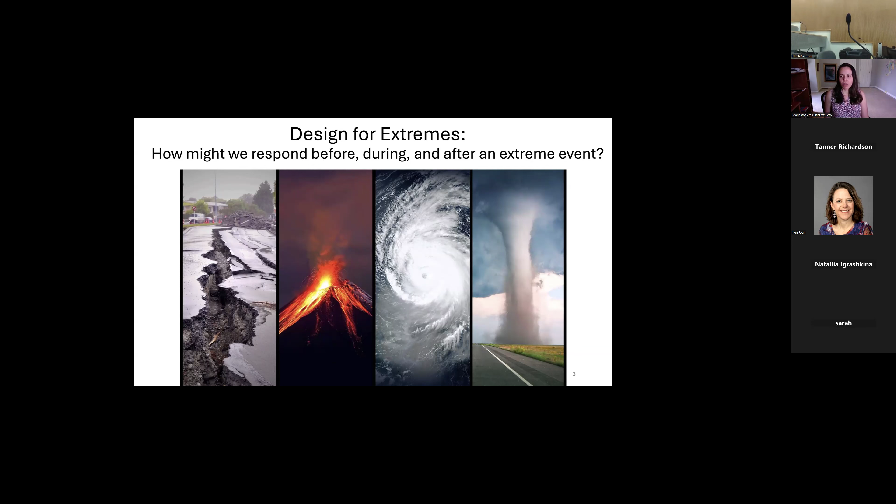So what can we learn from site visits after an extreme event? I will pose that first question. For those in the audience that may not be familiar with these organizations, I just want to do a brief introduction about these EERs. These are reconnaissance networks, and EER is the Extreme Events Reconnaissance.

So you have the geotechnical group, the social science group, the nearshore extreme groups. And as you can imagine, after an extreme event, you also have to think about the disaster, the debris that is being created after the disaster. That's where sustainable material management comes in, like how do you manage the debris after an extreme event? There are also groups that are near the coast, so coastal structures is another focus.

My experience in this space is that you also have the ISEEER, which is the Interdisciplinary Science and Engineering Extreme Events Research, which is basically in the middle, unifying all the other EERs. I left the link there in case you want to check out all of these different EERs.

But then the one that I've been involved with is actually the structural focus, the STEER. So STEER.network, if you haven't seen this before, is the idea that is building resilience through reconnaissance. So it's a network. This is sponsored by NSF.

You basically go and learn from these extreme events. And the way this works is that it's building capacity. It has coordination as well as collaboration. So this is not just for academics, but also other people that are involved in this space. The idea is that as we're documenting what is happening, we can have a broader audience and disseminate widely from anyone that might be interested.

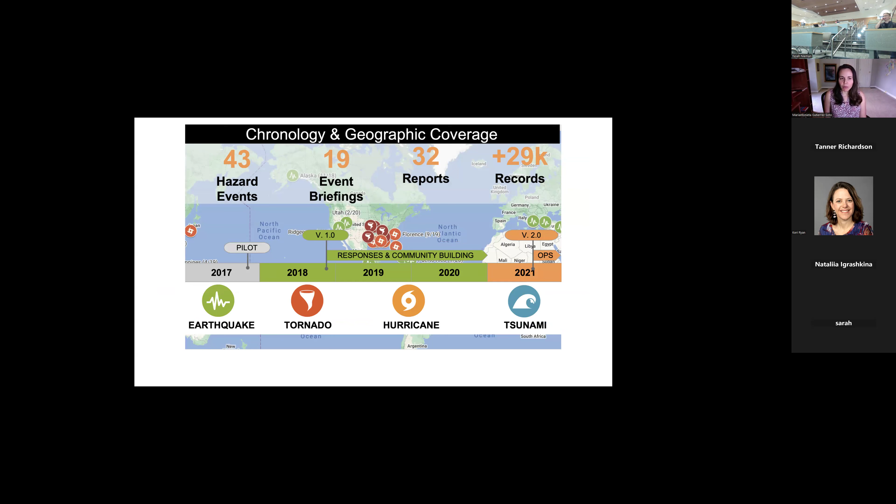Since it starts at 2017, there have been many different events that have been responded since then, event briefings, reports, and records that have been documented throughout the years.

Now, the way this works, the response workflow, is that it can either be a major hazard that has little potential to generate knowledge. So when there's a big event and the potential to generate new information is small, then we will deploy an event briefing. If there's a potential to generate new knowledge, then we start with a preliminary virtual reconnaissance report, which basically relies on information that you can obtain digitally, virtually from the media, from social media, and so on and so forth.

So things that we can assess without going in the field. And if there's a potential to gain some valuable information that is also new, then we will start responding towards an early access reconnaissance report. So we have these three different levels.

An event happens, and so for example, Hurricane Helene from last week, then we immediately created a VAST. So we're currently working on this virtual assessment, and depending on the information that we collect, we might be able to deploy some field teams so we can gather data and inform that information. Eventually we do this curated data set so that everything is cleaned and consistent.

So what sort of information do we capture when we go on these field assessments? Well, we can either do a door-to-door assessment using the Fulcrum app. We can fly drones over the sites to capture information about the overall damage. We can also get Street View technology, so you mount these cameras over your car and drive around to capture and get a sense of what information has been gathered.

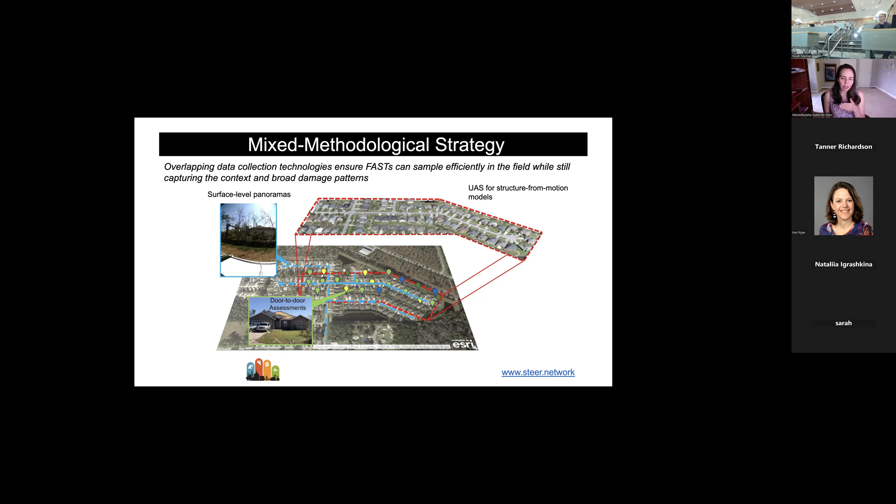So the door-to-door assessment uses the Fulcrum app, basically using your own phone. You can download the app, and what you do is start documenting with your camera and maybe some audio and free-form text to capture information as you're seeing the damage in place.

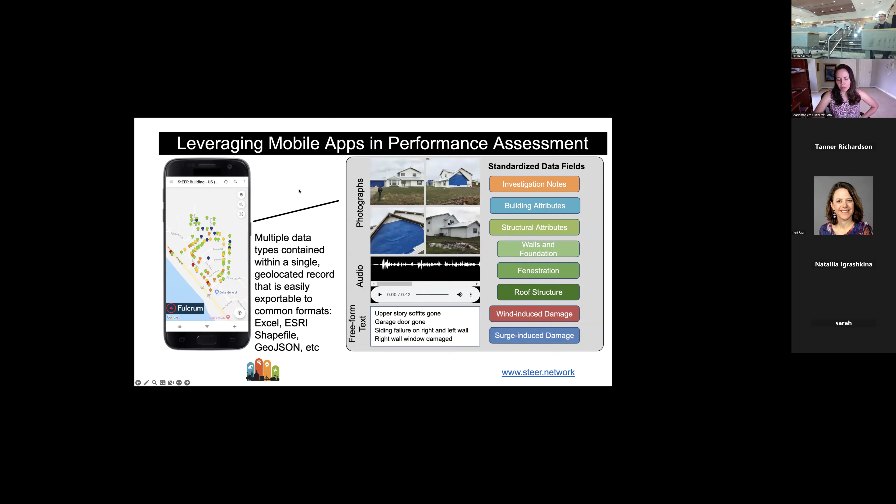So we capture all sides of the structure and get information about wind-induced damage. If for some reason you have storm surge, you can capture the water level, and so on and so forth. What's interesting is that we basically have a pre-deployment mission design.

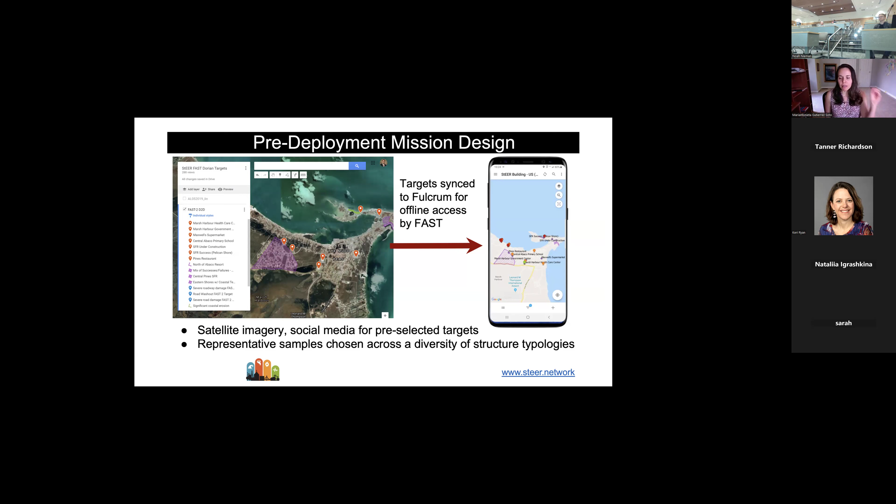So we will have coordinated information with different teams so we don't duplicate data. Then we'll have a team that might deploy to certain sites. We'll do some coordination and look at representative samples. So we're not capturing necessarily all residential structures, but just some that we think will be meaningful information for the field.

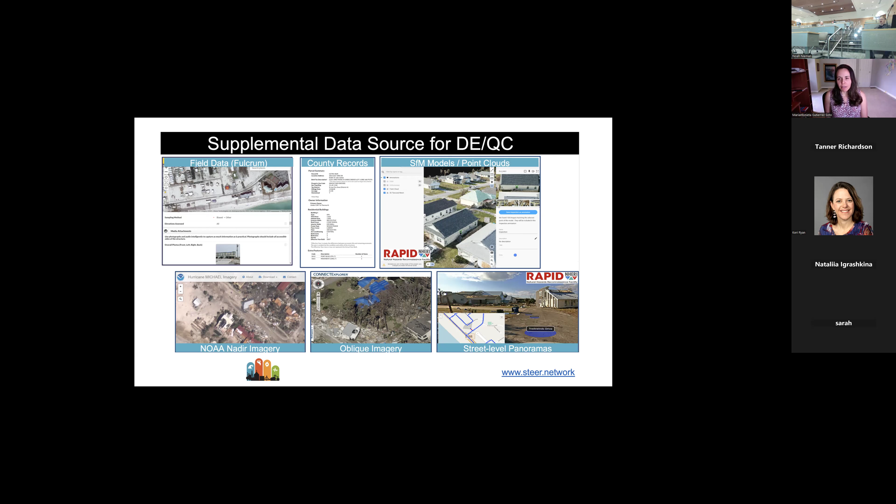So we will have additional steps after the assessment to make sure that the information we provide to the community is reliable. We will look at the county records, structure-from-motion models, the point clouds. We can also look at other sources of information, and you can see a variety of different data for data quality assessments.

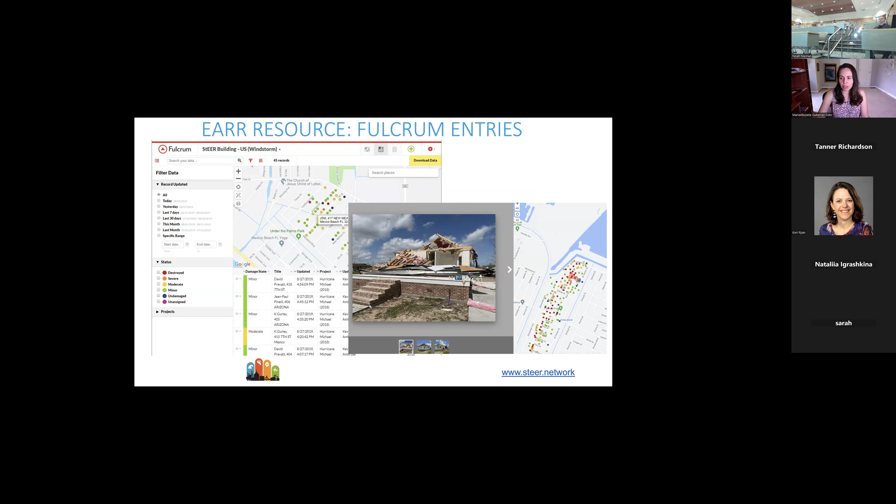So this is just one example. Each dot represents the level of damage - you can have minor, moderate, severe, or destroyed. Then from each of those data points, you will basically have an annotated picture about the actual damage perceived in that particular location. That's how we capture it.

A lot of this information we also upload onto Mapillary, which is like Google Street View, but it's actually Mapillary, and you're able to get access to different time lapses. So if you run your Street View today versus before, and so on and so forth - Mapillary is another source where we upload that information.

Design Safe will have some data sets, so you get information about the ground-based imagery, UAS technology. We also have detailed reports documenting what we did, and other information. So what's really neat is that once you have access to this community, you get access to all the records, and so on and so forth.

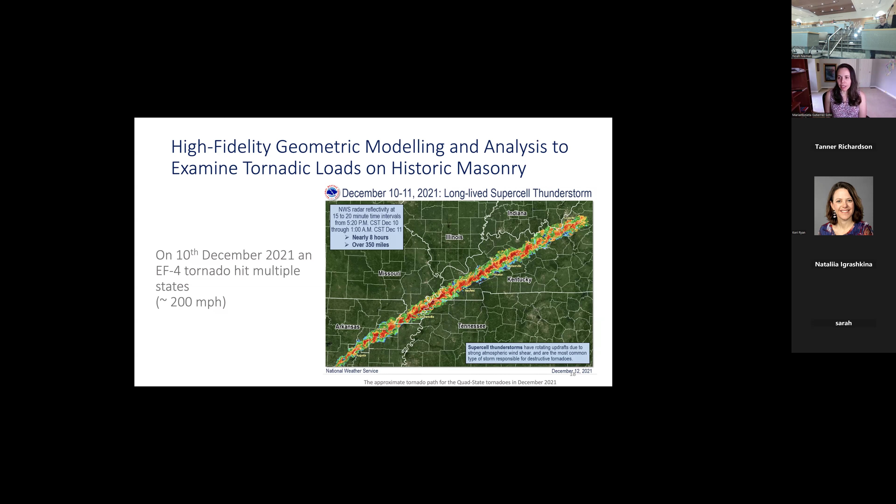So I can share with you my particular involvement after the tornado outbreak that happened in 2021. A tornado hit, and one particular area that got affected was actually Mayfield, Kentucky.

One of the things we noticed when looking at the site is that the areas that got impacted the most were actually historical structures. The US Post Office was constructed in 1910, and there was no indication in the code on how these historical buildings actually performed during tornado loadings. So we started looking at some information and gathering additional data.

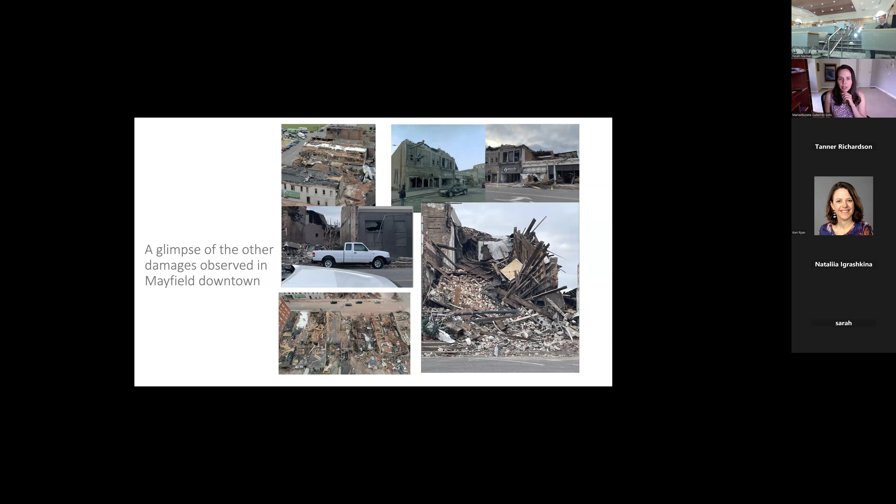After we did the assessment from the tornado outbreak, we went back and captured additional data, and we received a RAPID grant from the NSF to get more information regarding the performance of historical structures. These are just glimpses of the different damage types and damage typologies on the different structures we were looking at, and the different data collections.

So we have multimodal data, including laser scanning, photogrammetry, and drones. We have a whole team looking at the tags and how we gather this information. We also did street view and navigated different sources.

One thing we started developing in our lab is this Cloud to FEM. It's an open source software that basically takes a point cloud and starts developing a finite element model based on the point cloud that you're gathering.

Of course, one of the challenges with this kind of work is that depending on the quality of your point cloud, there are going to be some areas where you have to make assumptions regarding the material.

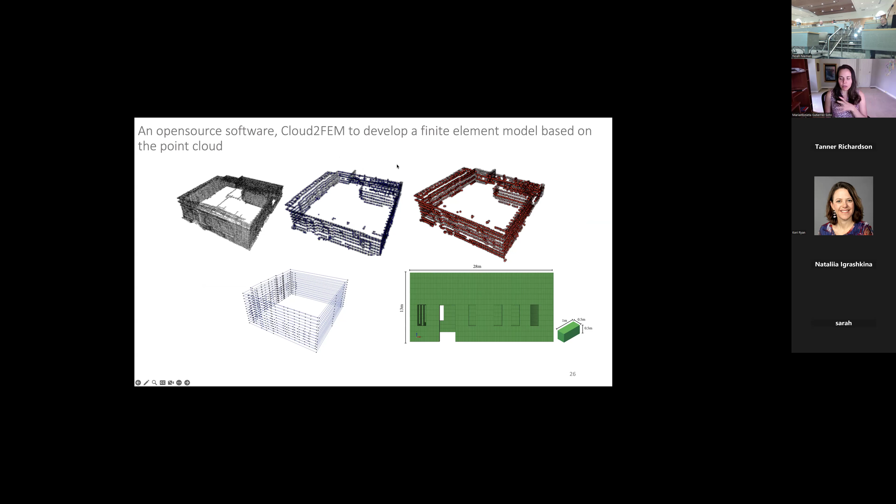So some assumptions for ASCE, like how ASCE 7-22 looks at tornado loadings for these particular structures, and the tornado speed that is estimated versus the site estimations, which is basically an estimation based on how the trees fell in the area and comparing between them.

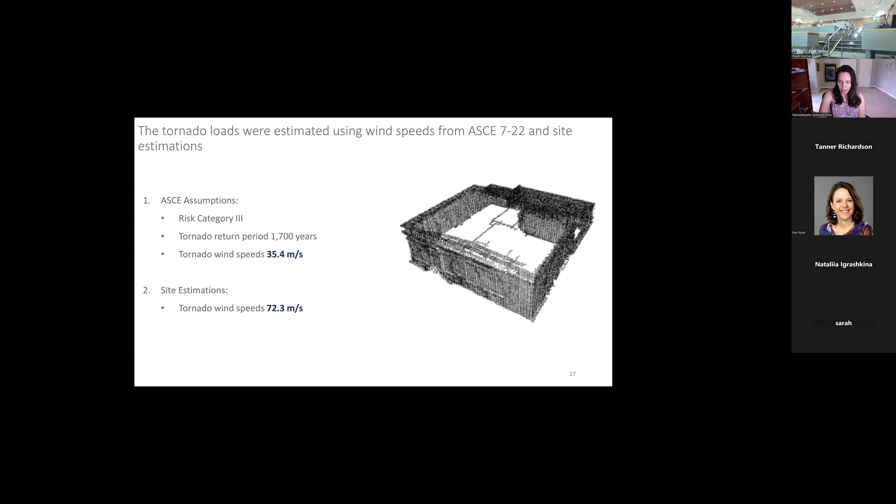We started looking at the stress concentration of the loading conditions, and then comparing the ASCE estimates versus the ones we actually estimated based on what we saw on the site.

This project will also give us information about how historical buildings fail under extreme wind loading, especially when you start looking at retrofits and other types of additions, and what is actually creating that failure.

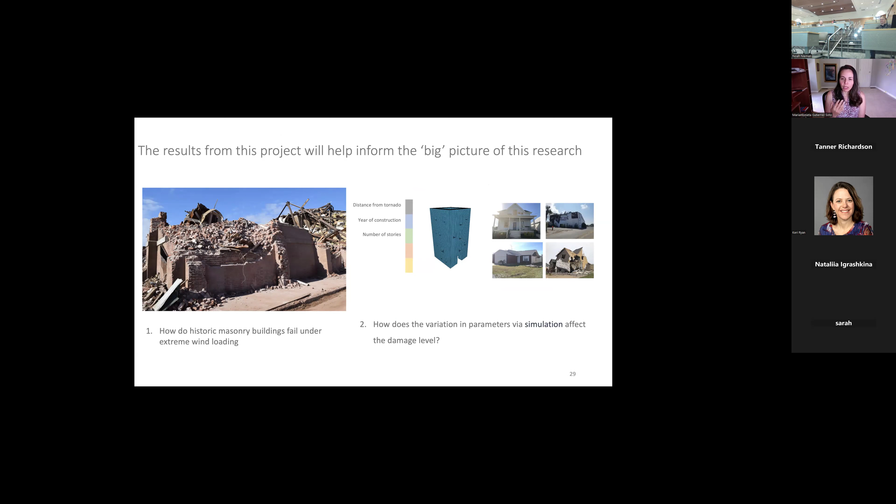When we look at the variation parameters via simulation, we can also correlate whether the damage we see in simulations matches what we saw on the site.

Since this is EERI, I'm sure many of you are familiar with Learning From Earthquakes. That program has been doing this kind of assessment after extreme events for many years. One thing we did as part of STEER is try to have all hazards in one place, not just earthquakes, because there's more than just earthquakes and all of it is important. Having one centralized place for this information was the vision for the STEER community.

Now, if you want to know more about earthquakes specifically, Learning From Earthquakes is definitely where you want to go to learn more about what's happening there.

Another resource I always find interesting, that students really enjoy, is learning about Disaster City. Texas has an area that was impacted by an extreme event, and they never rebuilt it, leaving that city in place so emergency responders could train there. You can also do research in these spaces if you're interested. It's interesting because you have full-scale collapsible structures and different levels of simulations you can do, and that information is available for you to check out.

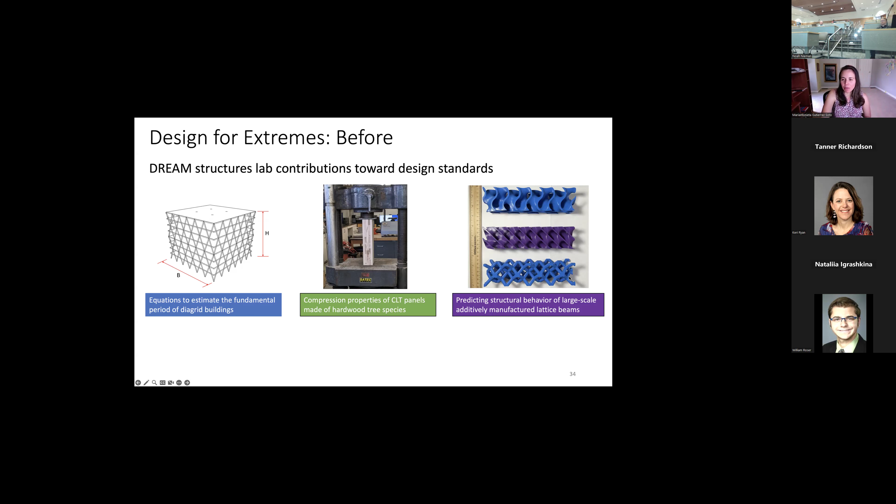And this one on the right is the one that looks most interesting, because everyone is interested in additive manufacturing nowadays. Can we predict the structural behavior when we start looking at the small to large scale applications? And if your new building is going to be built with these kinds of lattice structures, how will they perform? That's the underlying question there. Since this is recorded, you're welcome to check out the publications associated with this project to learn more.

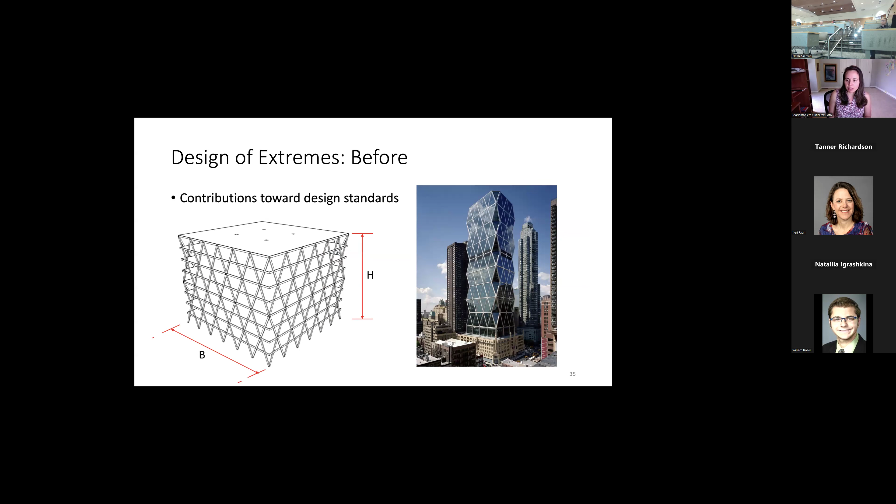Now I can tell you about these standards for diagrid buildings. This was inspired by the Hearst Tower, which is located in New York City. Again, the question is, how can we figure out the fundamental period?

One of the things we did for design optimization is try to minimize the number of elements needed to figure out the best performance. So we generated the FEM model, determined the size of the optimization problem, initialized the design variables, and then used the patented neurodynamic model of Adeli and Park to figure out the optimal design for each of these parameters.

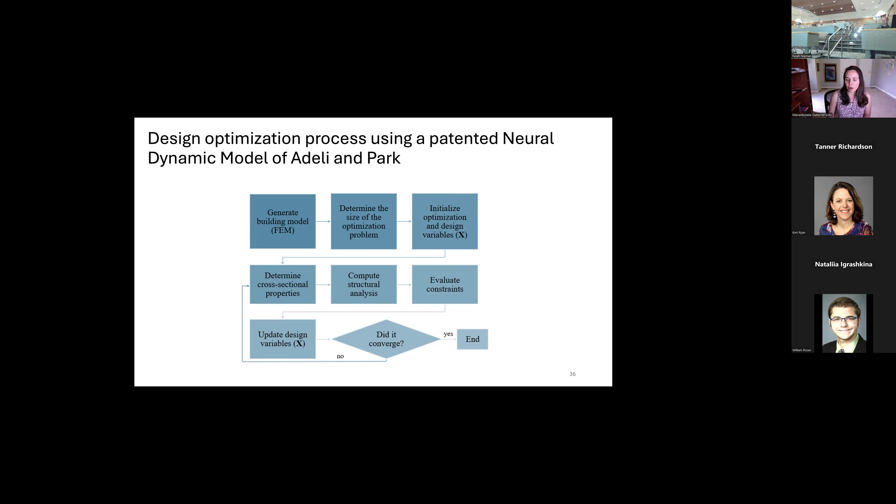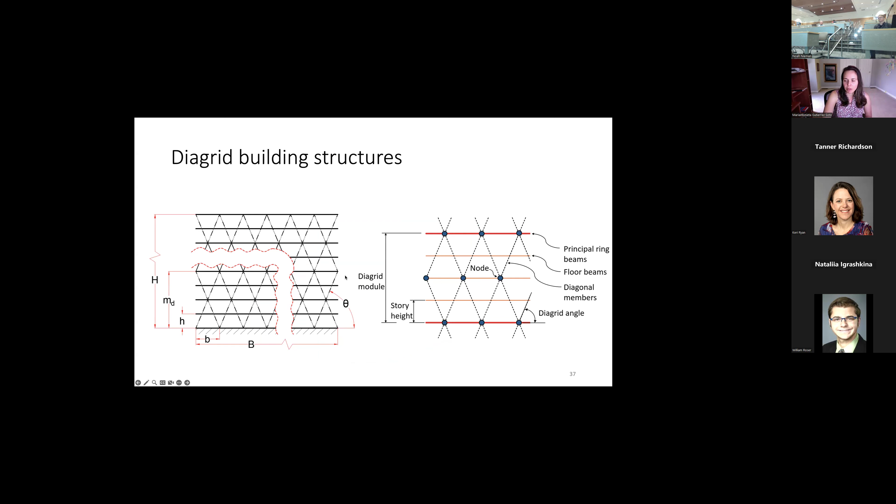The parameters under consideration were basically the width, the height, and the angle. In diagrid structures, the angle is very dominant because it determines how many elements you actually need to create it, and so on. So we subjected this to wind as well as earthquake loading, and started looking at the performance.

This patented neural dynamic model has been used in the past for the design of really large scale structures, and it's really innovative because it's learning as it's going. As your design is being improved, it's handling these nonlinear constraints really effectively, and it can guarantee that you're actually obtaining the optimal design, not somewhere in between.

So these are the results. We started looking at different angles for the diagrids and looking at the minimization. You start with an original weight, with a particular number of variables, and then you actually start minimizing. After iterations on the neural dynamic model take place, you start minimizing the weight. Once you achieve a particular plateau, that's when you know you've achieved the minimization.

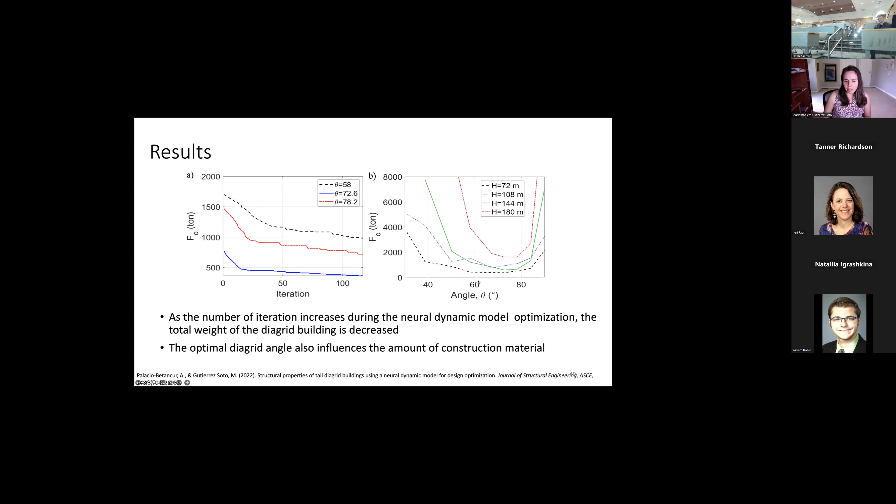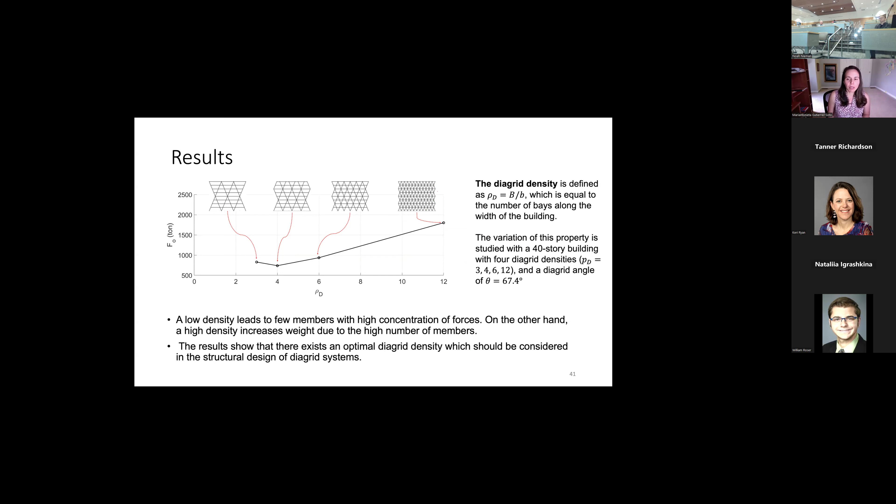We also looked at the angles and how that influenced the design, and once you have those angles, you start looking at the density, which is one of the big parameters. Alejandro Palacio was the one looking at this particular project for a long time. He actually simulated over 200 buildings to figure out the performance.

All of these become optimal designs for different kinds of configurations. We started looking at whether we could select one equation that describes everything, and this is one equation that can actually describe what you see in the figure here. But because we wanted something a little more friendly for the design guidelines, we broke the estimation into three equations, so that you only have the height as well as the angle of your diagrid as your parameters.

So we also started looking at this one, ASCE 7. Notice that the angle is not being taken under consideration. To have a similar look, we proposed this one, but then there's a second, more accurate long version. You can see the differences between these three with respect to height and the period calculated.

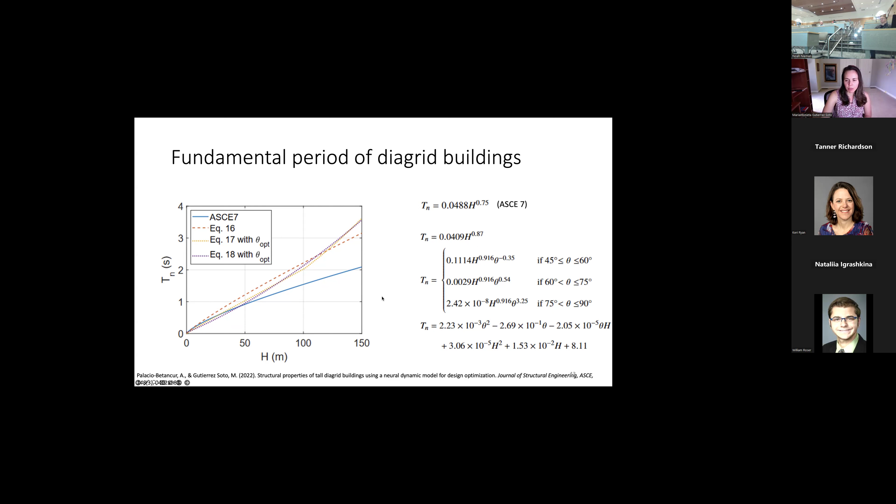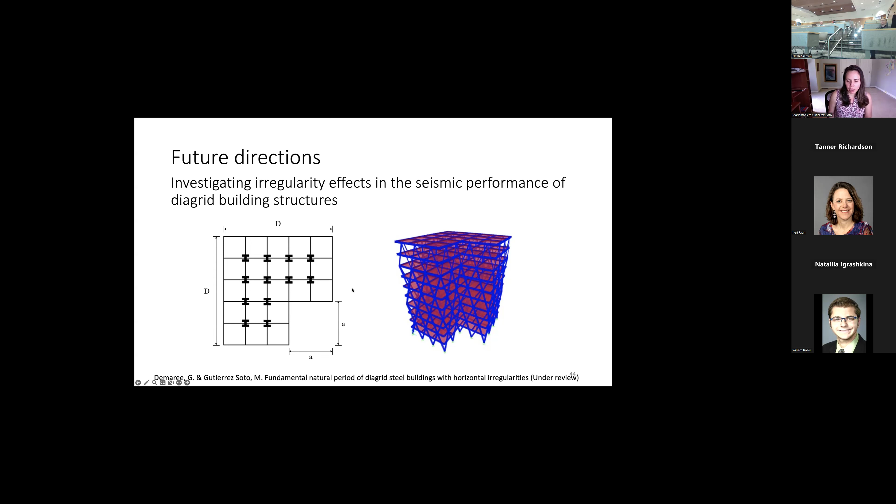One future direction we're currently looking at is being run by Garrett Demaree. He's looking at the irregularity effects on the seismic performance of diagrid buildings—not only diagrids, but also when you have a particular vertical setback. How could that influence horizontal irregularity, or if you have setbacks, how would that affect the actual performance? So that's up and coming, stay tuned.

So far I talked about contributions we've made during the assessment and reconnaissance after an event. We've discussed what happens before the event, but there's also something we've done during the event: this idea of smart structures. How can we use smart technology to protect buildings from natural hazards? This smart structures technology is really interesting.

The idea is that you put sensors to monitor the health of the structure. You have sensors along the structure capturing signals, just like in a medical office where a signal determines whether your health condition is good or not so well. Similarly, you can do the same for a structure.

The idea is you're capturing some information—displacement, acceleration, or some other form—from the structure, and that information is given to a computer. The computer captures this information and monitors how the structure is performing.

You can see how this can be super important during extreme events. In this particular tall structure, the Canton Tower, the taller the building, the more susceptible it is to vibrations caused by wind events. But being able to design for earthquakes too is also very critical.

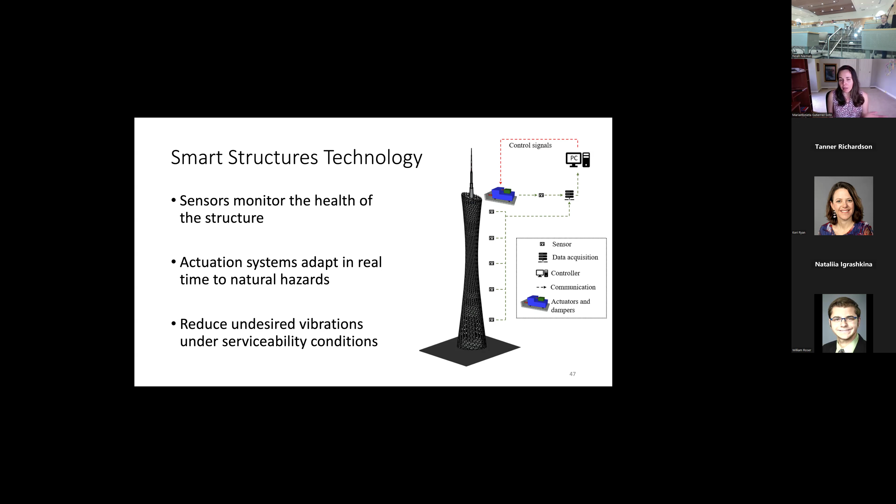Being able to capture that information in real time and give feedback is key, so we equip these buildings with actuation systems so they can adapt in real time, given by actuators. You have a feedback loop: information from the structure goes to the computer, and the computer does something about it—moving left or right to dampen vibrations. This improves the longevity and response during an extreme event.

There are different types of structural systems able to do this. You have passive structural control systems—for example, the pendulum tuned mass damper in Taipei 101, one of the tallest buildings in the world. As a designer, you determine the length of the steel cables that allow a 660-ton steel ball to sway one way or another, directly related to the fundamental period of the structure.

In this case, you don't need sensors—you just place the ball and tune it for one frequency, and that's it. With an active mass damper, you have a wider range of frequencies you can adapt to, but it requires high external energy power and must be active. In this example, you have two active mass dampers that sway in the X and Y directions, with sensors capturing the information.

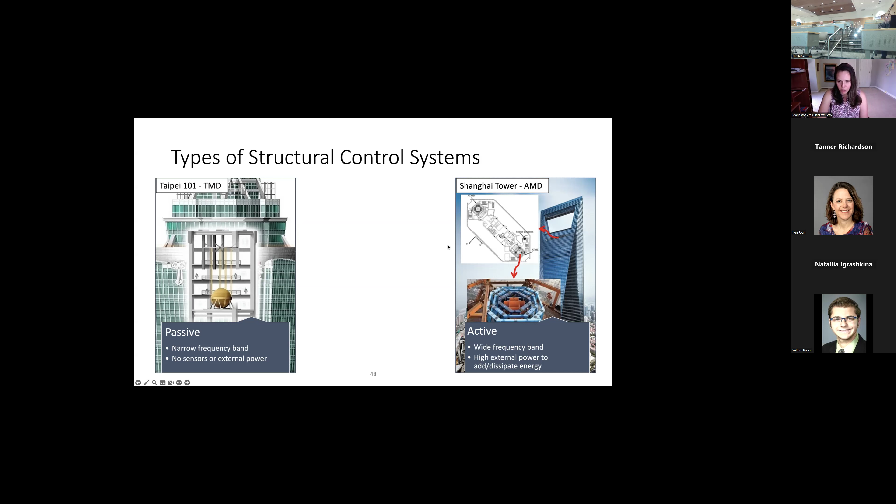The best of both worlds is actually this idea of semi-active devices. Another example is the HIDAX, from the Kajima Corporation—they have 72 of these installed in this building. It covers a wide range of frequencies but doesn't require as much power to perform.

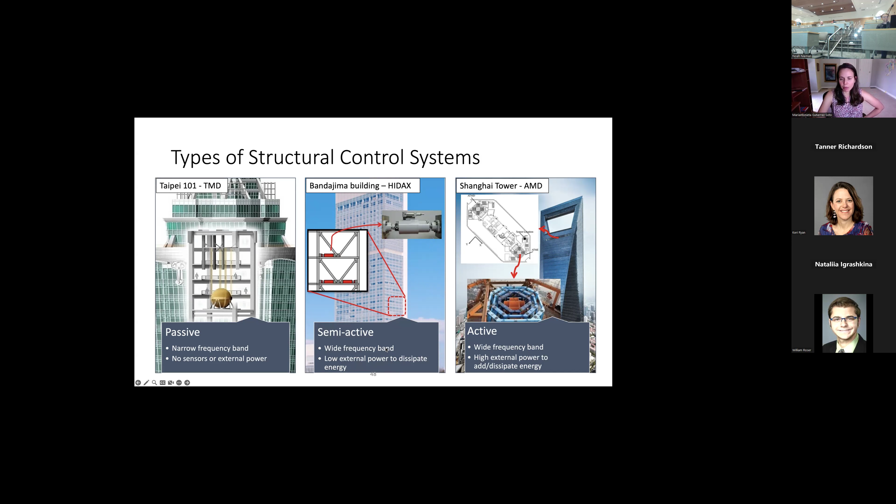The question is, if you're gathering this information from the structure, how do we adapt in real time? When looking at smart structures, think about your own sensory system: we have sensors, information being processed, and that information is given to actuators so they can move in real time. This is one example of the first smart structures in the world, with three different variable stiffness devices and a computer connected to the sensors.

So the sensors are giving information to the computers, and the computers are telling the devices to move in one way or another, and you have an emergency electrical power source there as a backup in case you need it during an earthquake event. So that's basically the idea. Now you're gathering this information, and then it's giving it to the brain. So how does the building actually process the information and be able to adapt in real time?

There are different methodologies to do that. One way that we do that in our lab is actually using game theory. Game theory is the study of strategic decision-making, using mathematical models of conflict and cooperation between intelligent, rational decision makers. A lot of times when you think about game theory, that usually appears in economics, political science, biology, or psychology.

So this idea of if you're playing a game, like the prisoner's dilemma, or some of these other examples, you're looking at rational individuals. Now, if our building could think, and if as intelligent individuals, then we are able to create something that is able to adapt to a variety of different natural hazards, and it's able to have cooperation between actuators. So if one starts failing, the other one can cooperate, and so on and so forth.

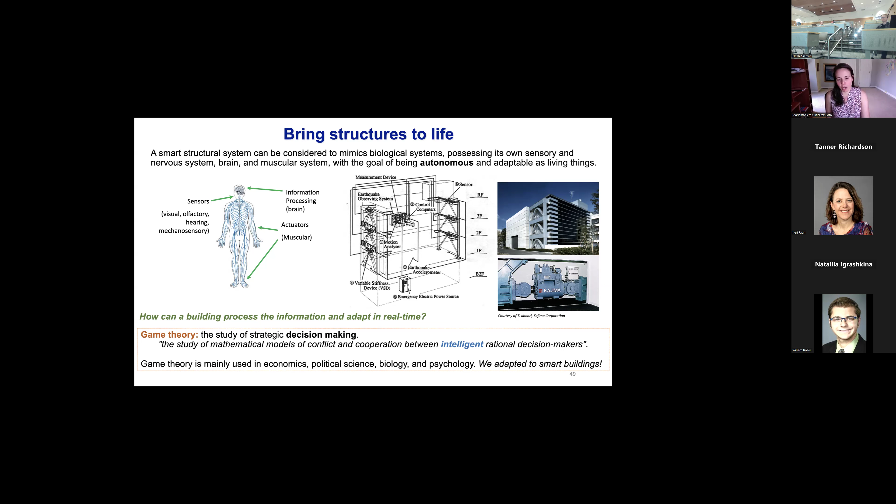So we adapted this technique, these game theory models, and integrated it into buildings so we can have that sort of adaptation and give it some actual intelligence. In order for us to make that happen, we combine three different concepts. One is agent-based modeling, coming from artificial intelligence; decentralized control, from control theory; and evolutionary game theory, specifically replicator dynamics. Those are the three key ingredients for making this happen.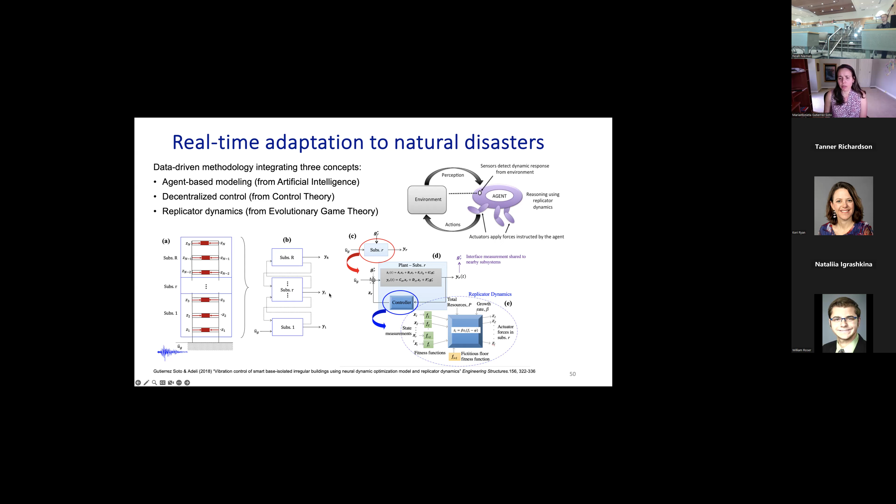So while this game is being played, this distribution of resources—the actuator forces—are being distributed across all these different devices, and that's what captures the minimization in terms of displacement or acceleration, whatever it is you're deciding to do. So this is what's really interesting. And because it's such an innovative strategy, we implemented it on a 20-story building where we have 20 different devices across every floor. We also started looking at smart base isolated systems.

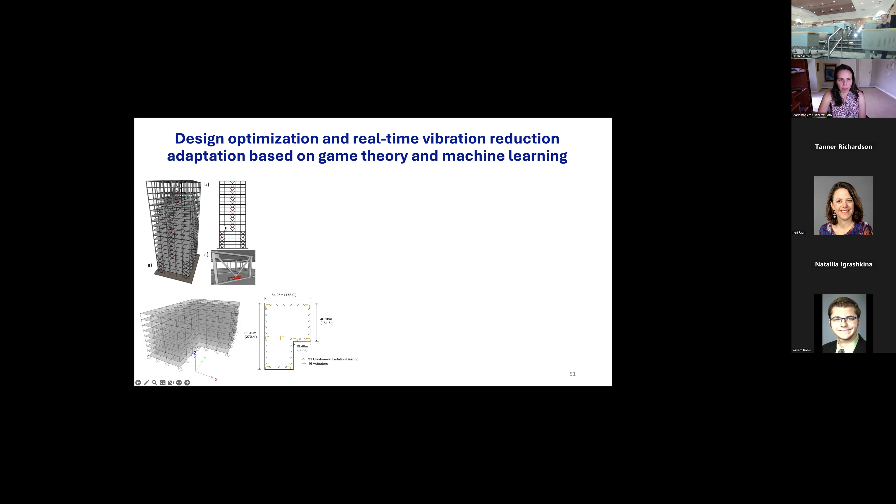So that means that you have base isolation, but you also give it some actuators at different locations, so you're also being able to adapt to those configurations. The difference between the first example and the second one is that this one is across the elevation, while this one is all at the base. So they present a different dynamics here.

Another thing we did is that we took a bridge. This is an actual bridge in California that has been equipped with viscous devices. We said, okay, if you have these viscous devices, what happens if you have semi-active or active devices? How would they behave? How would you distribute the resources? And we did that for that.

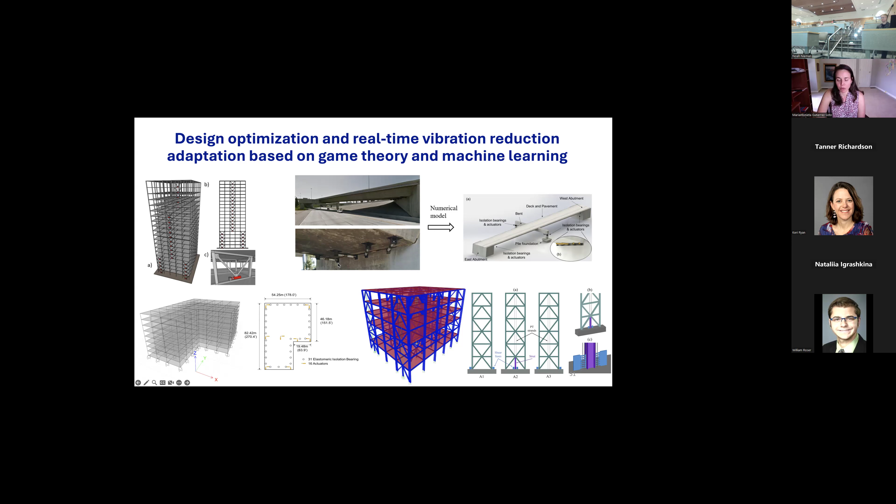We also started looking at these control rocking brace frames and then looking at optimization for that as well, looking at where would you place this, how would you design it to mitigate that, and using this technique for adapting to those. Now we talk about the way it's going to think. Now, how is it going to be able to do that?

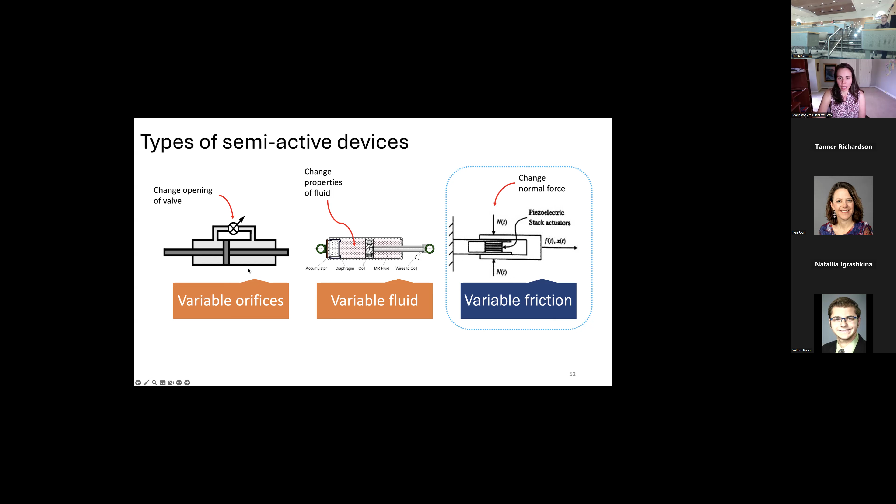So there are different types of semi-active devices. We have variable orifices, variable fluids, or variable friction. In some cases you're just opening and closing the valve. In some cases, like the MR damper, you can actually change the properties of the fluid, and that's the one that is causing those changes. But in the case of variable friction devices, you're actually changing the normal force. And that's the one we thought was really interesting, because when you're looking at variable fluids or variable orifices, you are relying on the fluid itself versus being able to just inject the force in there.

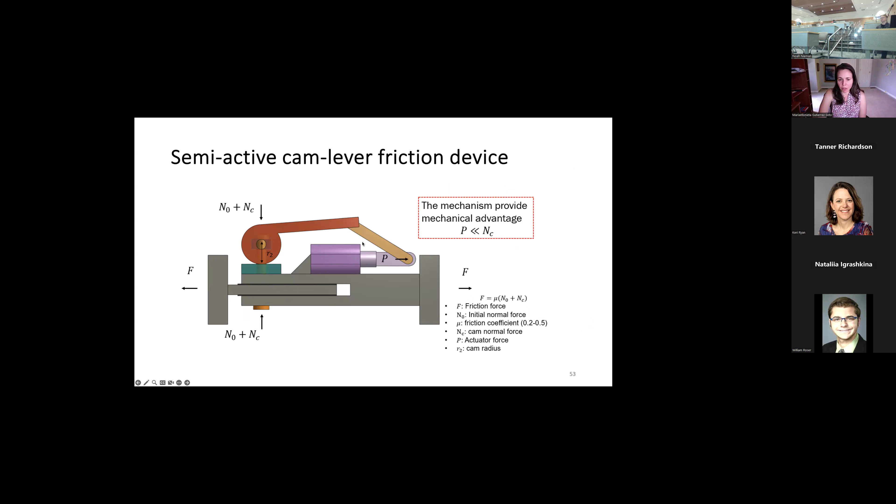So we got inspired by the bicycle. If you notice the mechanism provided here, we can see that for each push on this, you actually have a mechanical advantage that is related to the length of the actual devices.

So we started going on different prototype versions, and it has evolved, and now we're in version 5 or 6. We started looking at how we would move the solenoid to be able to exert that normal force there, and seeing how the number of variable friction devices can actually perform that case.

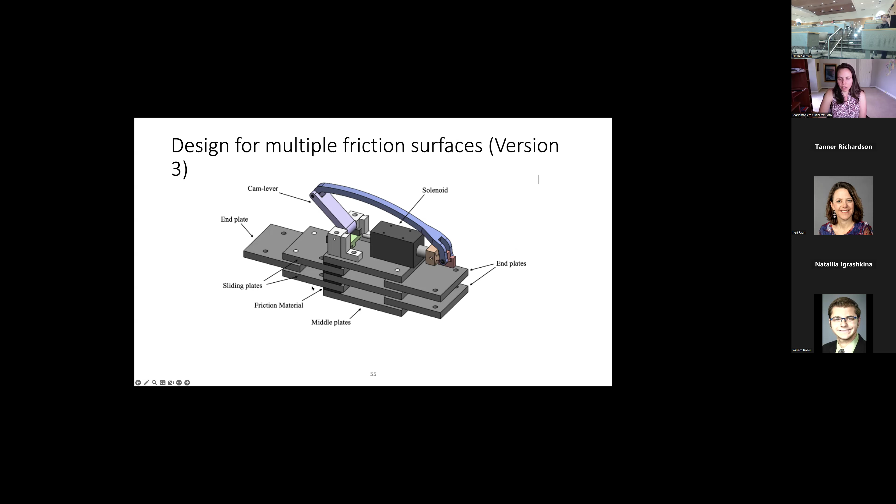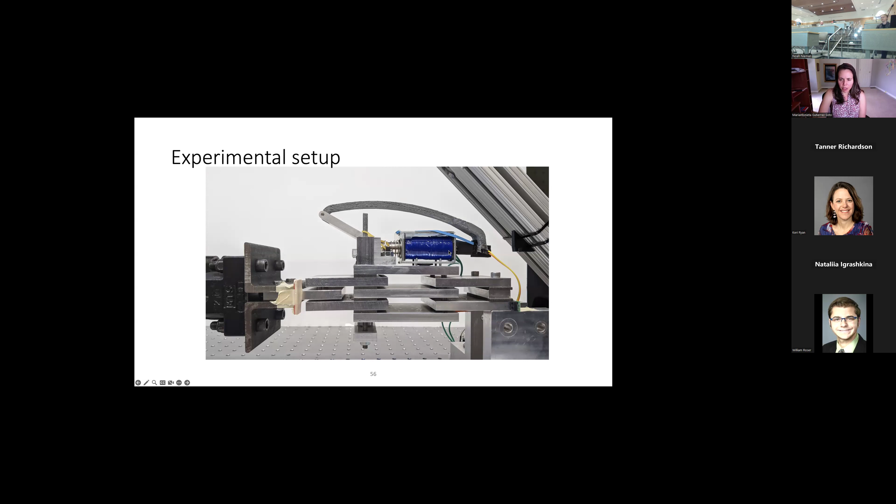So this is what the prototype looks like in the experimental setup. We have these different plates that are being connected with friction in here, and the device is exerting some information. So for each of this, we'll have some information, and the load cell is capturing how much force is being generated. We have the displacement sensor capturing how much is moving. So we have some setups where you're looking at 2 friction surfaces and one that has 4 friction surfaces.

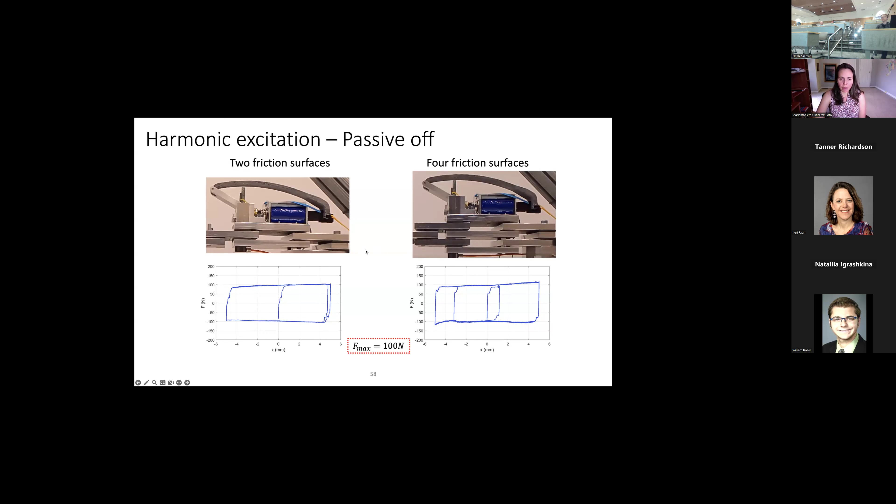We started looking at the performances when you have passive off versus when you have the system in passive mode versus passive on, which is a completely different extension and how many forces are being dissipated because of that. So we increased the capabilities from 25 to 30 in this prototype, and we were able, when you have more play, to actually increase it more.

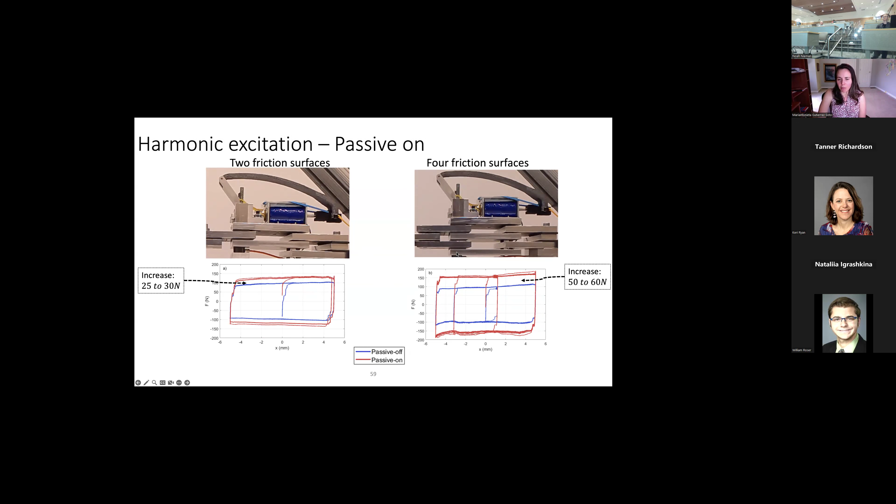So we started looking at, okay, so we have the capabilities to change that. So how do we actually modulate? We started looking at on and off controllers, which is a common one used here. The media is not playing for me right now, but you can see this is how the device is moving here. This is ongoing work in our lab.

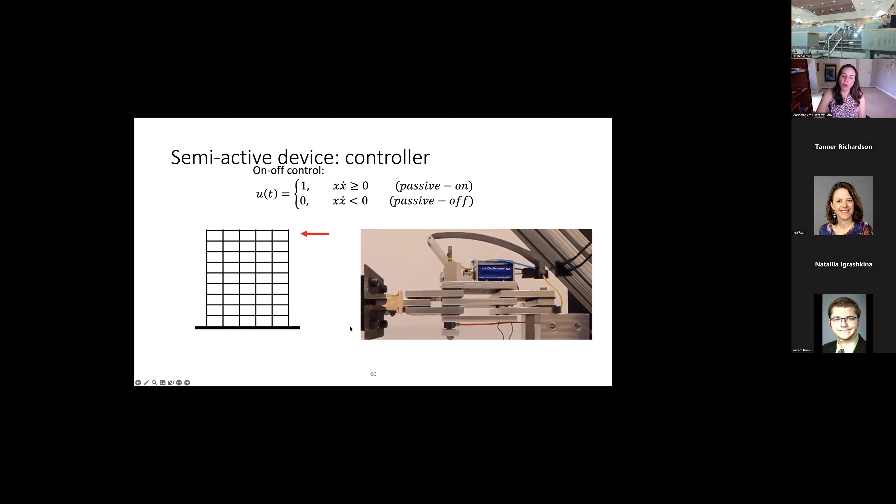We're really excited about the potential here. And right now we have a theoretical mechanical advantage of 100, which means that for each newton that is being generated, you can generate 100, which can help a lot with the capabilities and scalability of this particular technique.

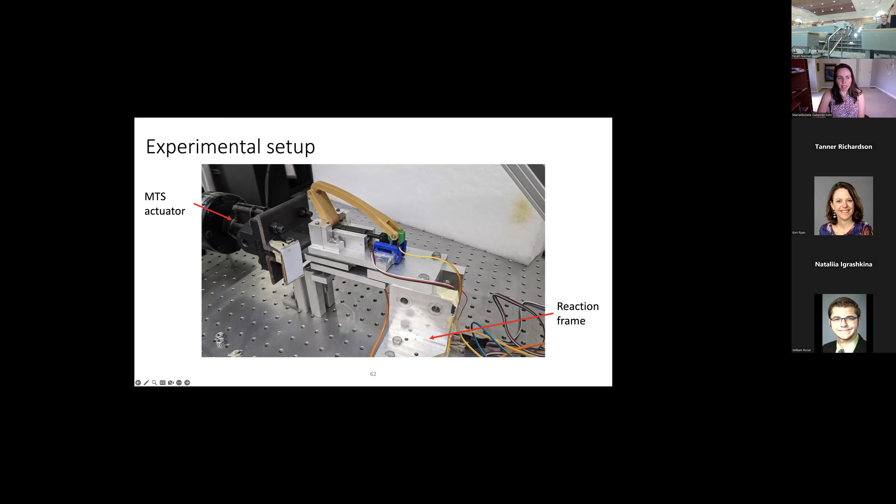So we do have a cyber physical test setup where you have an MTS actuator, you have the reaction frame, and that is being moved. You have the sensors that are capturing the information, and again, the load cell and so on. So this is the new configuration, and you can see how we're able to validate the mechanical advantage of this.

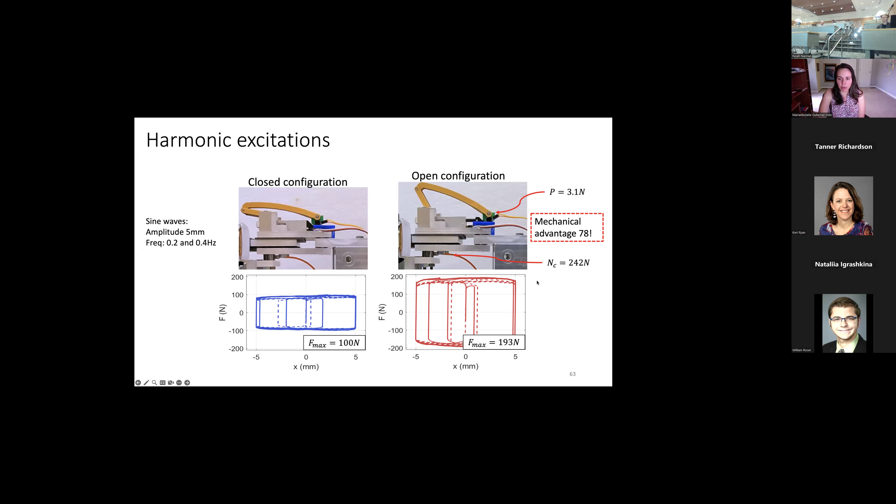So for each of the sinusoidal waves, when you have it in a closed configuration, versus when you have it open, you actually do generate that mechanical advantage. So we didn't get the 100 that we get theoretically, but 78 is pretty good. We're really encouraged to do that. And one way we can validate the performance is actually through this thing called real-time hybrid simulation.

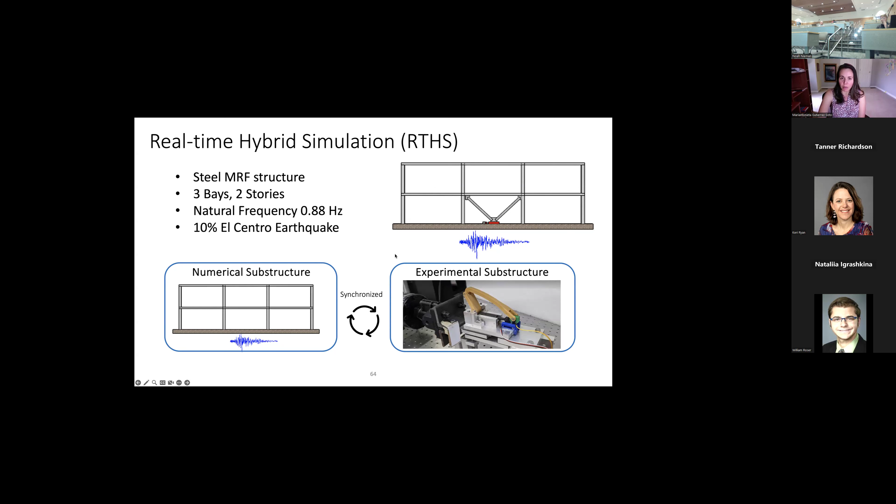So if you were to model something in the computer and you have something experimentally, you use this technique to validate how the performance is happening. This requires synchronization to happen. So you have this steel moment resisting frame, and you're subjecting it to an earthquake, and you want to see how this device is performing. This is a way for having that interaction between the numerical and experimental substructure.

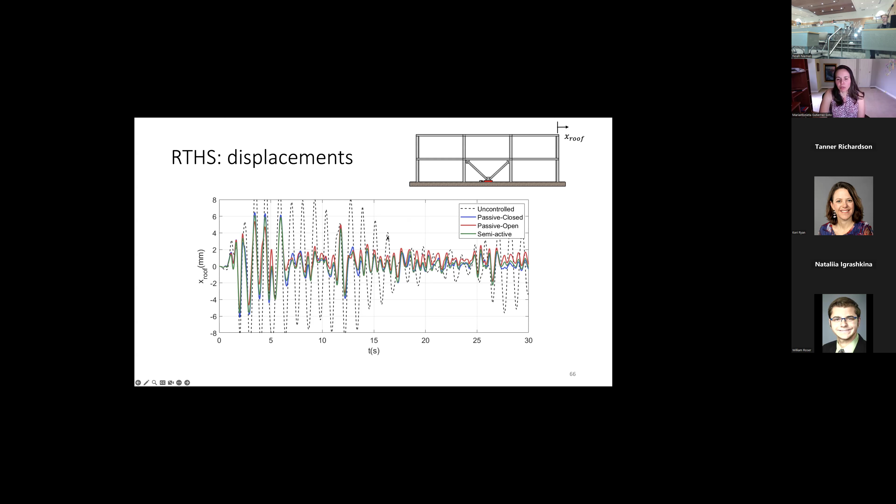Now, these are the different results from the experiment, and you can see how the semi-active is moving and adapting to those changes. So we're really excited about that. These are the results from the displacement: you have the uncontrolled one, what happens when you don't have a device, and what happens when you do have the device, in the open and closed configurations, and also the semi-active. So this is ongoing work that we're really excited about.

Real-time hybrid simulation is definitely a cost-effective technique that we use to validate different setups. In this case, we had one device that we're validating, but in the future we could have three of them, and place them at different locations. This is what real-time hybrid simulation can offer, because you're able to place this device anywhere as long as you're setting it up in the numerical model, and then testing it experimentally.

You can check out that publication regarding that synchronization, because you can see how an earthquake is being subjected on the computer, and then you say, okay, I'm placing this device here, then this node is moving in one direction. This node is moving to the right a certain distance, you're giving that displacement to the actuator, which moves this damping device in one direction. That load cell is capturing some information about it, and that's fed back to the system in that one time step. So this interaction between the numerical and experimental substructure creates some delays in the system.

Being able to address that delay is something that is very critical in RTHS simulations to make sure you have accurate performance. So that's another thing we have looked at so that we can have this as accurate as possible.

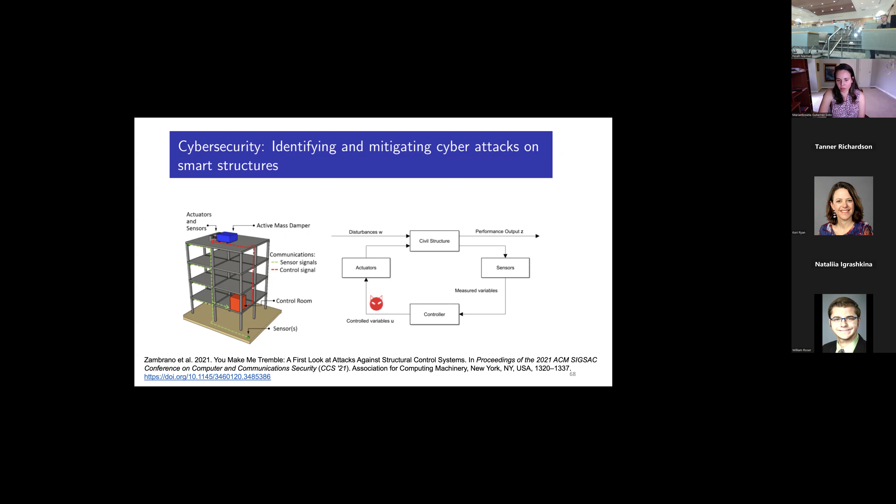So if you sense that there's an intrusion, how do you mitigate that? This is where game theory comes into play, because you're able to adapt and change the configuration. This is something we looked at in this particular paper, so you're welcome to check it out. We do have some videos where you have these two different devices moving in real time. If the attacker gets a hold of the bottom one, can the top one actually mitigate that change, and is able to do that? We're really encouraged to continue to process this information.

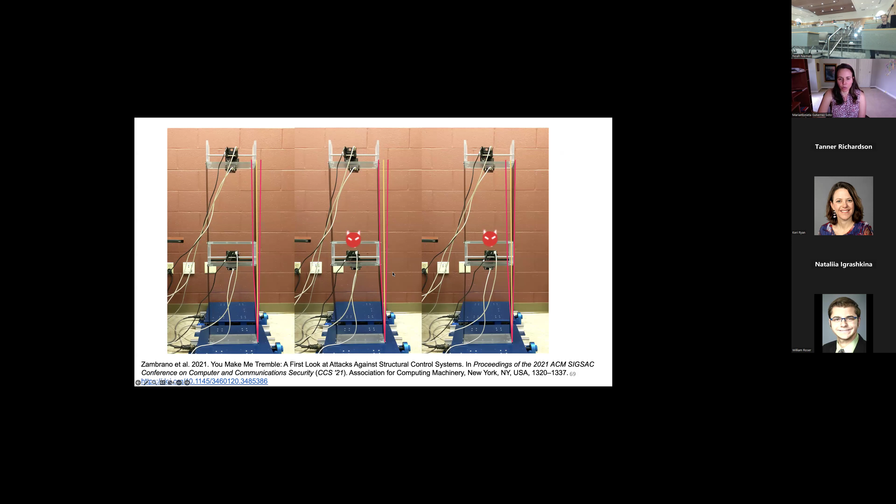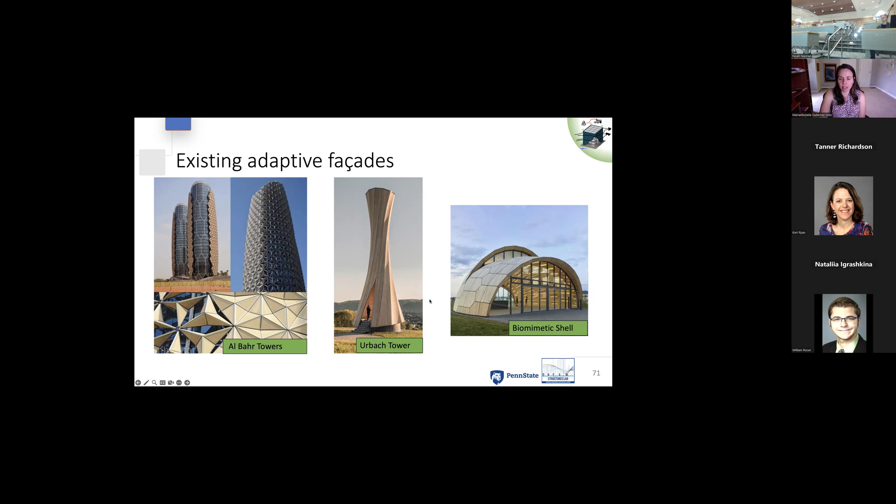Now, another topic that is really interesting is this idea of aerodynamic mitigation. We have heard about adaptive facades that change shape based on natural ventilation, solar energy, and other things. But what's really interesting for us is how we can adapt some of this technology for extreme events. We noticed there's a lot of damage to non-structural elements in tall buildings, so how can we leverage this information for adaptivity to make this more efficient?

Now, the way this is traditionally addressed is by looking at major or minor modifications. Major modifications look at the overall shape of the structure, while minor modifications look at the corners. So you have a square building, you could think about rounded corners, recessed corners, or fins, and all of them have different ways to mitigate the aerodynamics happening on the building.

Now, recently, we discovered some researchers who were looking at the outer facade to actually improve performance. So instead of having that tuned mass damper, you can look at the outside facade to increase the weight, and we thought that was really interesting.

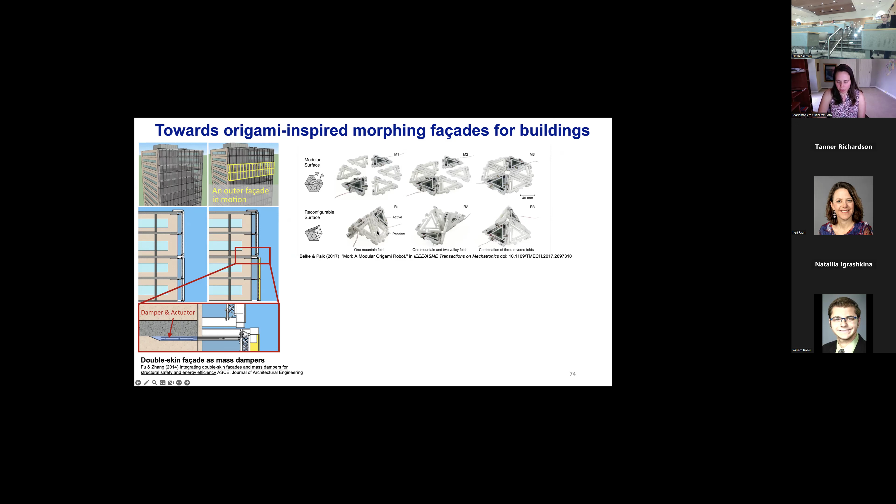We also looked at this other paper that had some Mori origami. We thought it was so interesting that you can 3D print these triangle shapes, give it an Arduino and some actuators, and they rotate. If you give it some information, it starts getting these reconfigurations. So we thought, what if we actually put this on a building?

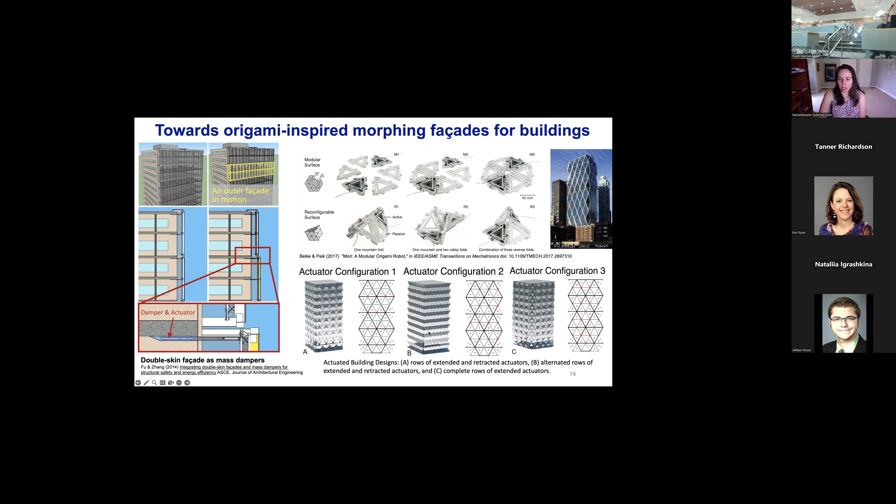So it goes back to the Hearst Tower here. We had a researcher start looking at what if the entire facade had these different configurations, and we were able to push and pull and generate different shapes. So if we could generate these shapes across the overall building envelope, how would it perform?

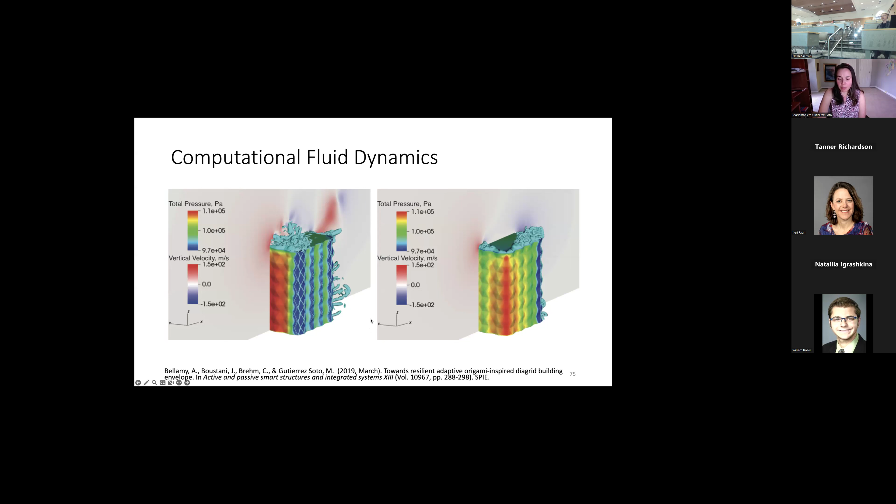So we started conducting some computational fluid dynamics, and we have some really interesting results that actually show you could improve a lot of the aerodynamics using this technology.

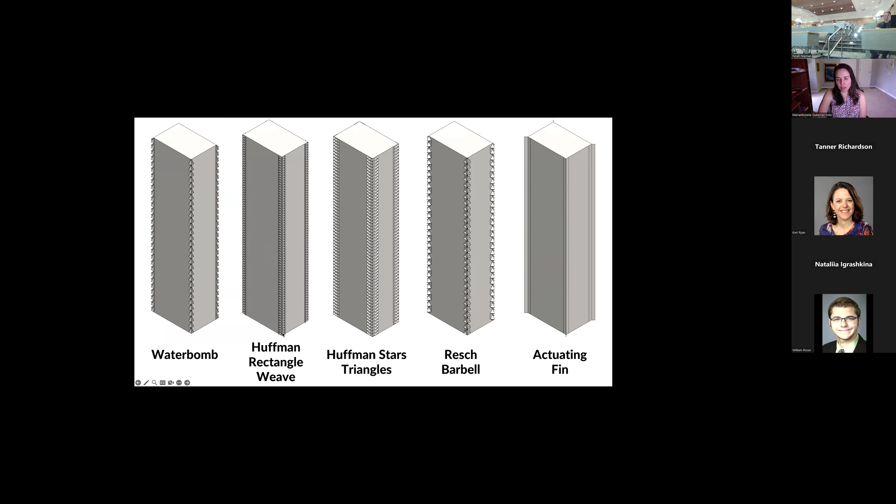Now, because it's really expensive to do a full building envelope configuration, we started looking at just the corners. We had another student look at what happens if you could deploy something there, going between a Waterbomb pattern or existing origami patterns, to see how they would perform.

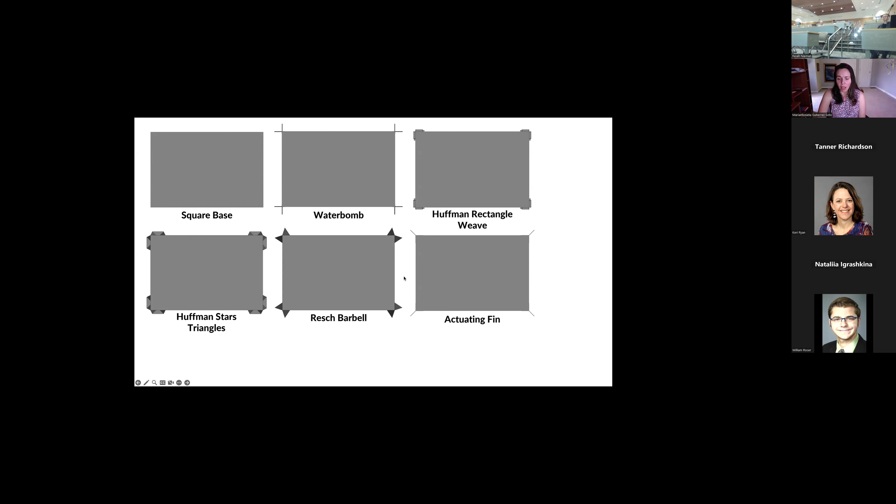So these are the different shapes. We wanted to see how close these origami patterns could get to the ones already established in the literature in terms of aerodynamic mitigation. These are the different results that the student came up with.

That's Aaron Roffling. He started looking at existing tessellations and how they could be adapted as a kinetic facade, looking at paper-based examples and then the ideas of thick and rigid folding criteria, which is extremely important in mechanisms and origami design.

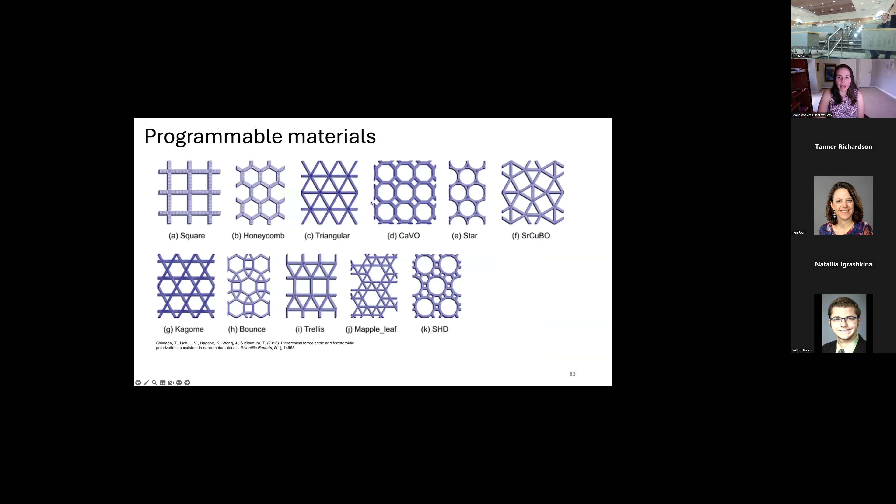What that means is how far away is the thickness itself—this is no longer paper, materials have certain thickness, so when you're folding it, the spacing between them manages the stability, and so on. He looked at how these different patterns could fit in the corners, and then did computational fluid dynamics to evaluate the performance of the different designs he was exploring.

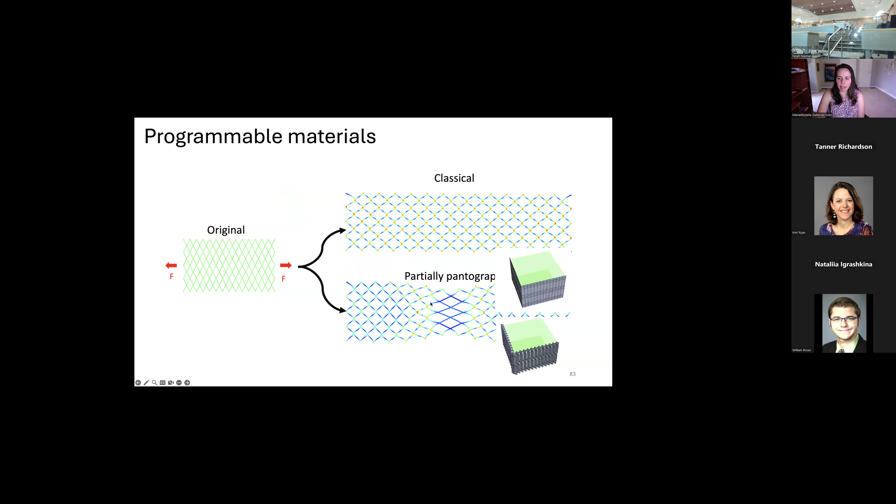Then we started looking at, okay, you can figure out the origami patterns to put on your corners, but how do you actually make it move? We looked at programmable materials where you engineer the material to achieve different performance sets you don't traditionally see. So we asked, how can we adapt some of this technology into the origami space?

We looked at this rigid link configuration, and thought we're not going to put actuators everywhere. So if we only have one actuator moving left to right, and different hinges with lock and unlock mechanisms carrying different information, how can we rotate those hinges to achieve the shapes we're interested in?

The conventional approach is looking at one actuator per joint. That takes a lot of energy, but the benefit is that you have a lot more control in terms of how you plan and create the shape you want.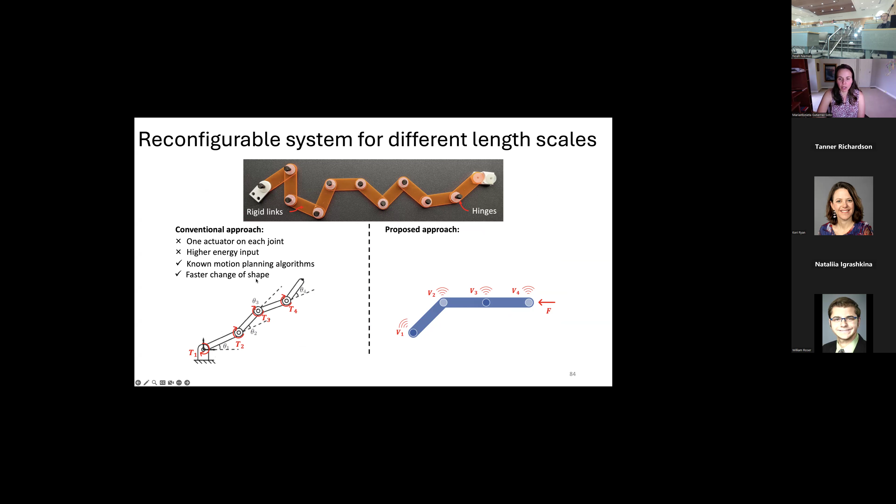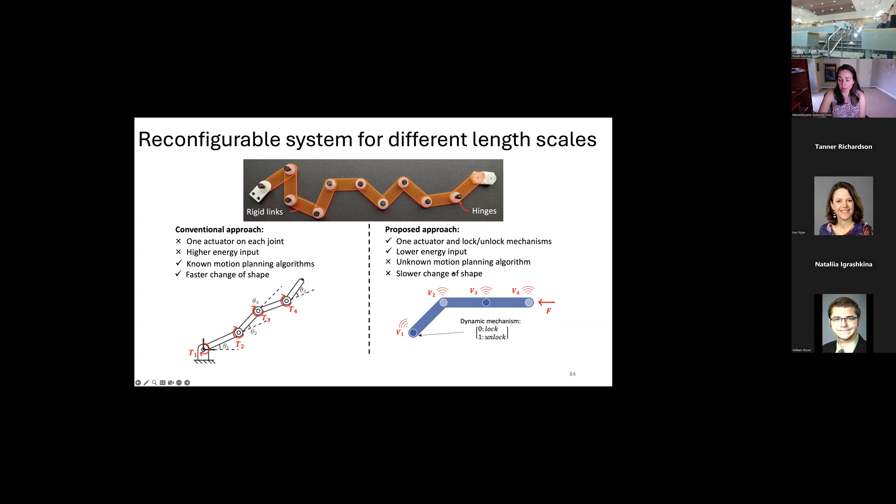Now, because we're just using one actuator, locking and unlocking this joint, how can we actually generate the shape we want? We don't know what shapes can be generated, and it might be slow to generate. So how can we do that? We started looking at a motion planning algorithm to control it.

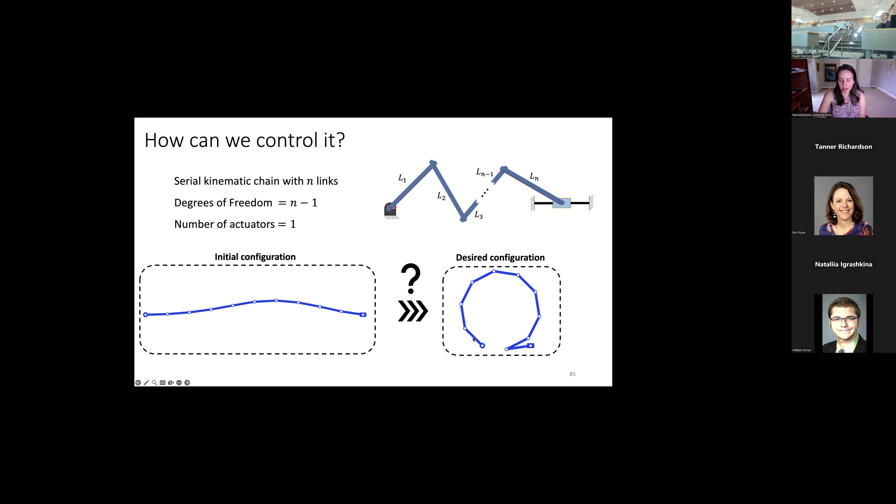The way this works is we have this chain mechanism with an original configuration, and maybe a desired configuration at the end. So how many steps would it take for us to achieve the desired configuration?

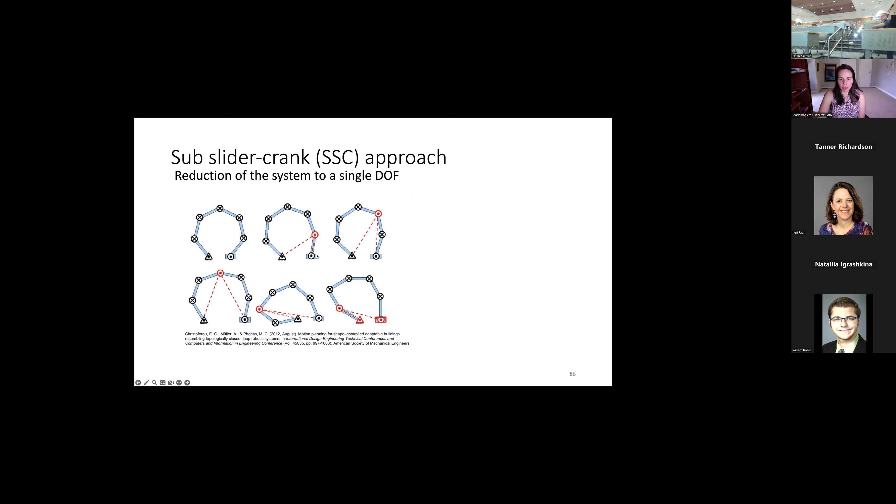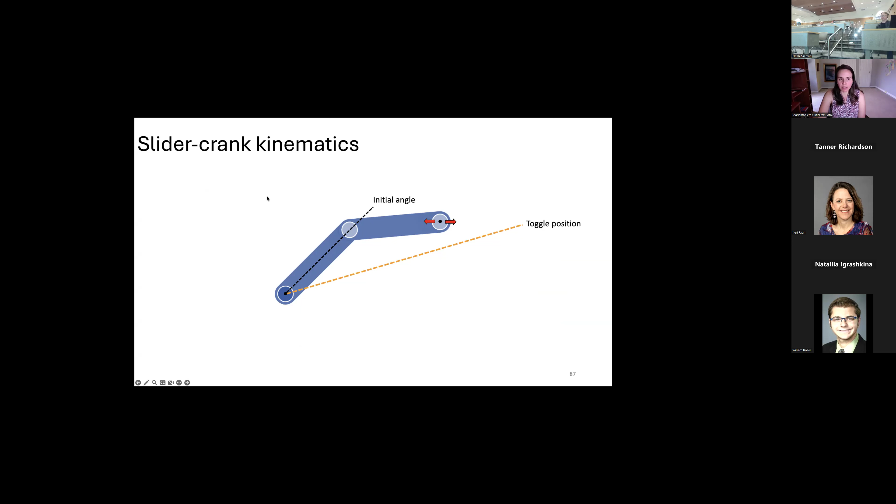For that to happen, we had to use a sub-slider crank approach—basically unlocking one joint at a time to create this slider crank and move it around. Because of time, I'll just show you quickly what the slider crank mechanism looks like. You have a toggle position, when it's straight, and that's the area you're trying to avoid.

So as you're moving left to right, there are only some feasible regions that you're trying to achieve. So we did the rapidly exploring random trees to be able to generate different configurations. This is an algorithm that learns as it's going, and how we can go from just a straight line, you move it once, and then you see this configuration.

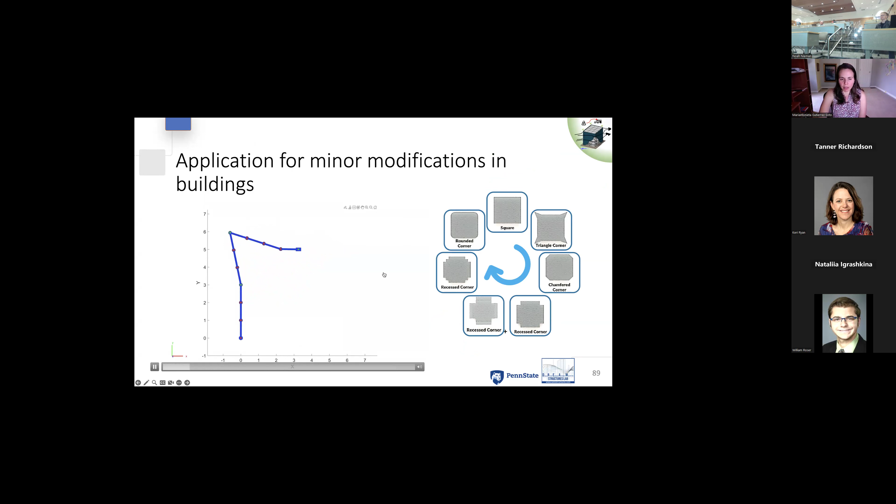Let me just show you what it looks like. In this particular algorithm, you start with a square and go from triangular to chamfer corner to recessed corner. This algorithm is able to go from one modification to the other. This is what's really interesting that we were able to capture - how with one slider you're able to achieve different configurations.

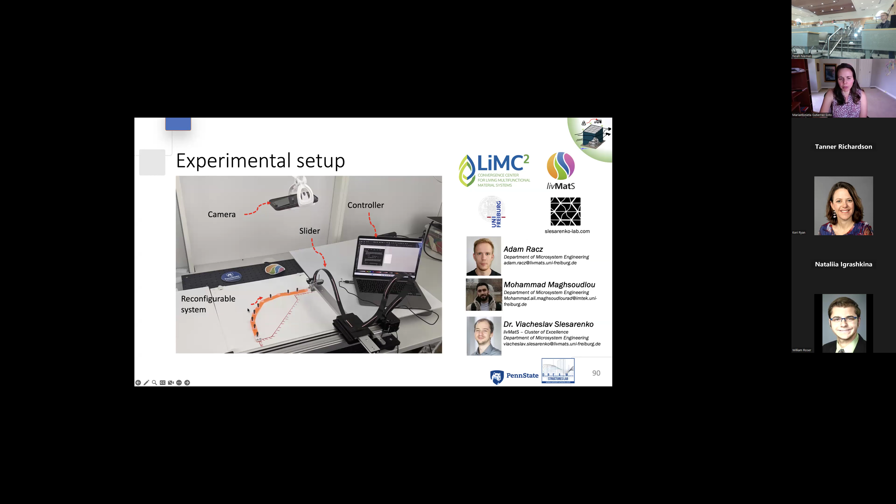This is a collaboration project with Dr. Slava at University of Freiburg. We did some prototyping and some experimental testing to test this idea. So this is what it looks like.

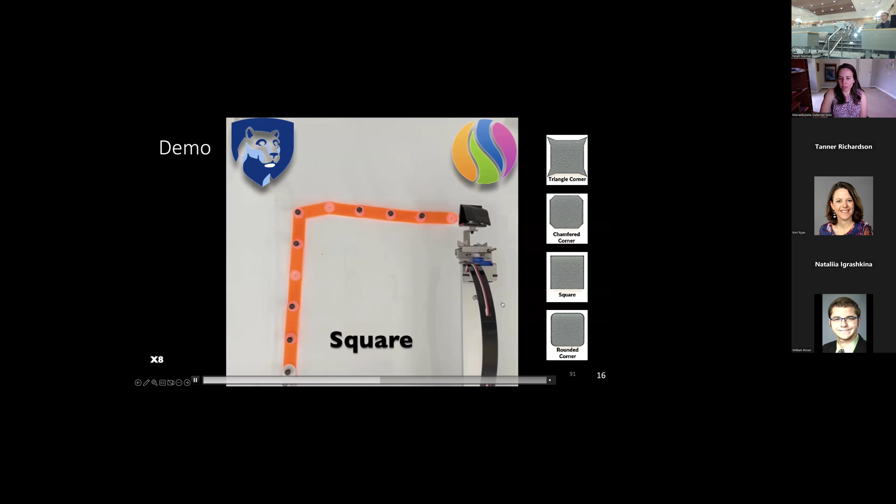So far, we have the triangle shape. By moving it from one end to the other, how can we achieve that? So we see how it's changing between those different shapes. This is at 8x speed. This is still at the prototyping stage, there's still a lot to be thought of.

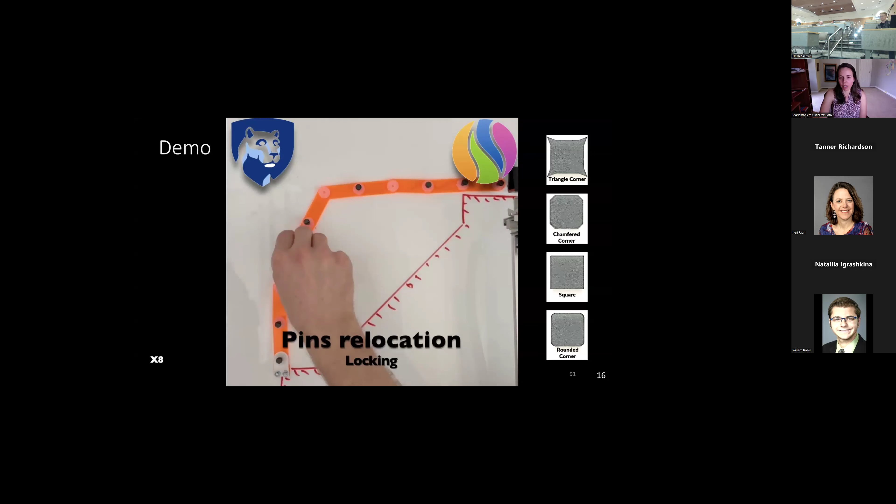Some questions here, of course, is like - this is all 2D, we are not looking at 3D yet. We don't know the load bearing capabilities of this yet, but it's definitely an area that we're interested in.

So in terms of design for extremes, what I just shared with you is a semi-active device that we're currently developing, testing with cyber-physical methods, using control methodologies with game theory to adapt in real time. We have some reconfigurable structures that we're looking at to explore these different mechanisms, as well as vulnerability to cyber attacks.

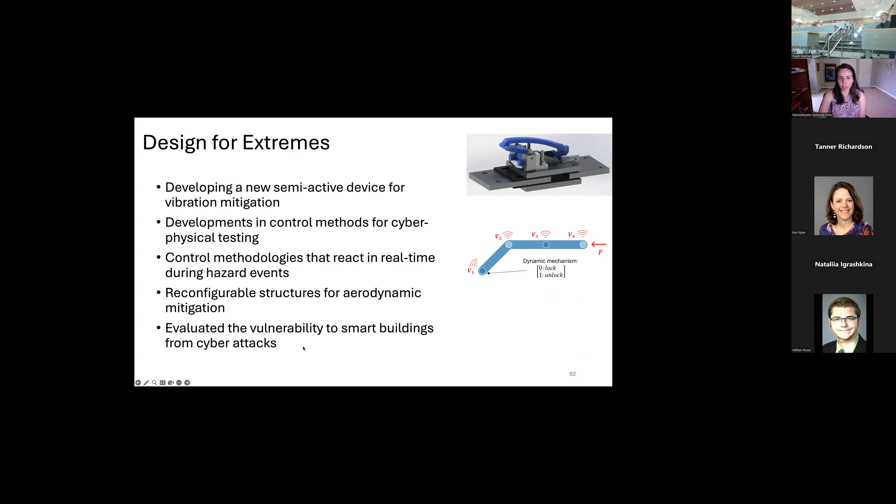We're really excited. I cannot do this without my amazing team. A shout out to our Dream Structures Lab team - Alejandro Palacio Betancourt, he just graduated with a PhD, did a lot of work into this space.

Suman Rocade was working on the lattice projects, and he is also pursuing a PhD in mechanical engineering. David Caballero Ruz, Elnath, and everybody else - this is a big team, multidisciplinary, architectural, engineering, and electrical as well.

If you are interested in this sort of vision for what the future looks like, I also invite you to check out the ASCE mega city project - in 2092 or something like that, what would a mega city look like in the future? Then the question is, what technology can we develop now so we can get to that future? I encourage you to check that out.

Without further ado, I'm going to leave my website here, sotostructures.com, where we have a little bit of everything that I just explained today for the sake of time. If you have any questions about what I just presented, I'll be happy to address them. Thank you so much for your attention.

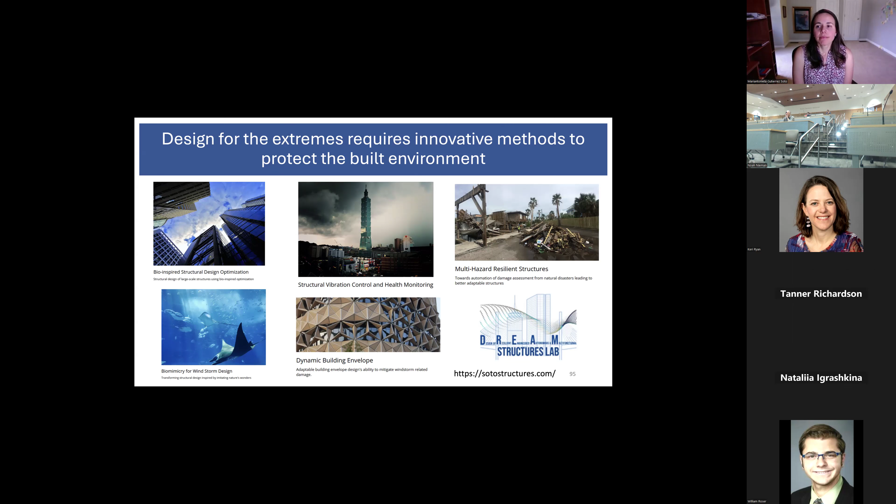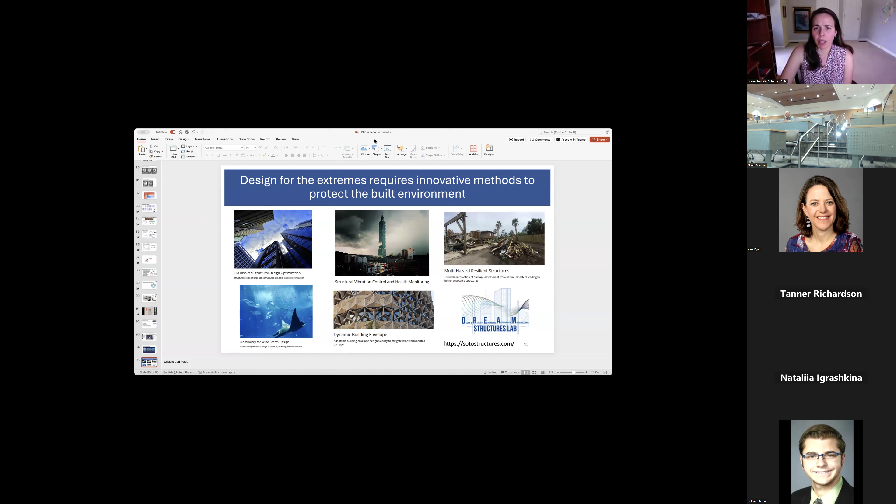All right, yeah, go ahead. Just in the mic. Can you hear me, Dr. Soto? Yeah, I can hear you. I wonder if Noah wants to stop recording - I wonder if that will help people ask questions if they're not recorded. Yeah, here, I'll go ahead and pause recording.